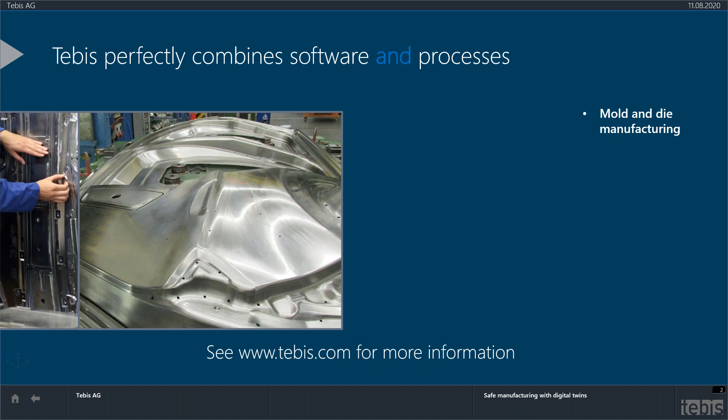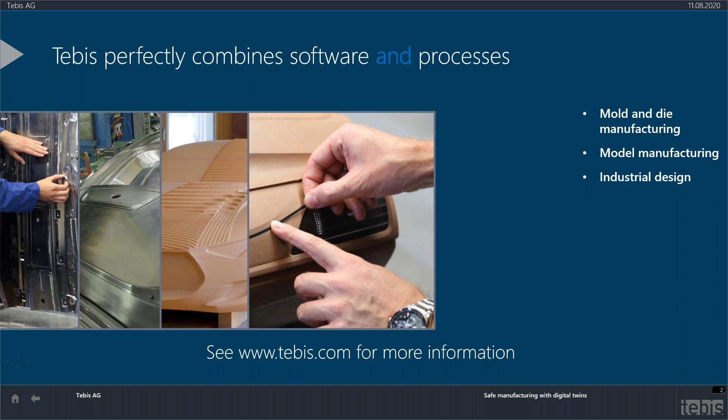That's not just in the mold and die industry, but also in the model and studio industry. These industries heavily utilize milling, machining, and manufacturing as a whole, as well as the aerospace industry and the production machining industry. We provide an essential level of know-how, knowledge, and technology that a lot of other software solutions do not provide, and we're fortunate to have many experts on hand to assist with implementation services or consulting services. We're not a small company by any means, but we have complete solutions for every single process you are looking for - processes that always make you as a customer more efficient.

We have over 2,000 customers worldwide, and over 9,000 installations of Tebis installed with happy customers. If you have not yet looked at Tebis, I urge you to go ahead and look at this. If you want more information, go to our website, where you can find a lot more information. This website has been completely redone just at the beginning of the year, and if you've not yet gone onto this particular website, I urge you to do this.

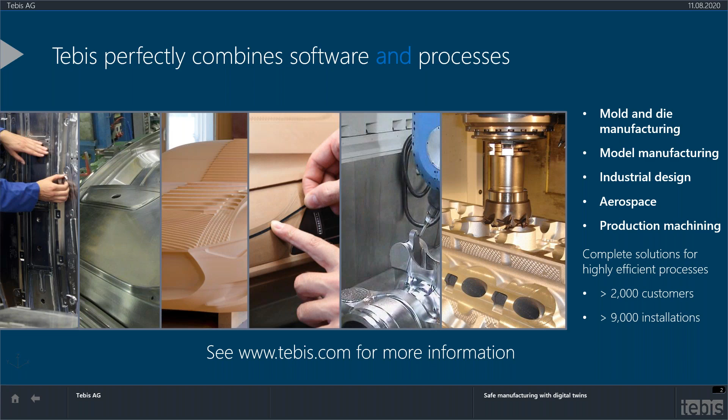I went to Wikipedia in order to get a very good understanding of what a digital twin is. It is essentially an exact digital replica of all of your physical devices that you're using for milling and manufacturing, etc. Some companies call it an avatar, which of course is very similar to it. But a digital twin represents all of your operations and all of your items that you use, from a physical product into a digital product.

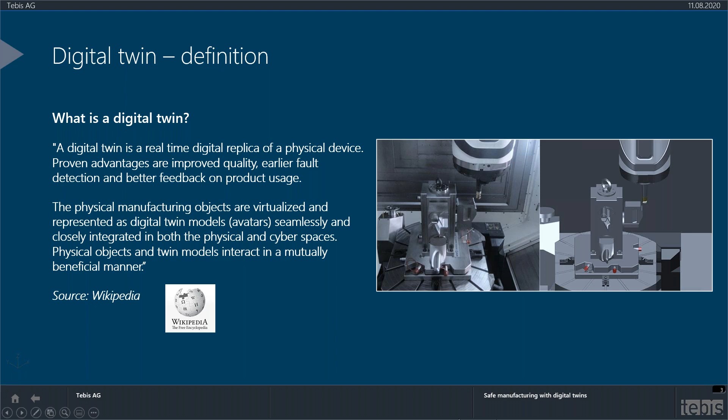So having that out of the way, knowing exactly what we're dealing with these digital twins, is this particular term a complete new term that just came out because of Internet of Things or Industry 4.0, which are all buzzwords we're hearing in the industry? I have to disappoint you, unfortunately, that this particular term, digital twins, or these avatars that are out there for you in these various systems, is not a new term.

We've had this term already for a very long time, and actually I think all of you are using a digital twin today. This has been around since the very beginning of CAD CAM, your job, the part that you are creating. This particular CAD model in a digital form is your digital twin that you're dealing with. So it's not just a picture on your CAD CAM system that gets displayed, but this particular item has a lot more technology embedded in the system.

Technology items in terms of understanding what kind of tolerances you're dealing with, technology that lets you know what is critical to your operation and what is not. That also gives additional information to the various departments that you're dealing with. So today, with today's CAD CAM systems, this particular part in your CAD CAM system has way more technology than what you've had back in the 80s.

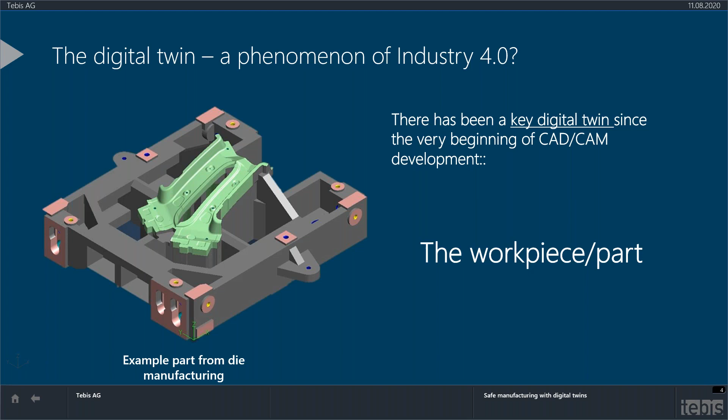Just to give you a little bit of a look back on the Tebis side, where did we utilize these digital twins and how soon did we do this? Already early on in our version 1.0, which came out in 1984 - we were one of the first CAD systems out there - you had a digital twin, which was the 3D CAD model, as we already spoke about, that represented your part, which is the real component.

Also, from the tool library, which looked very primitive probably at the time, we had a tool library that companies were able to use, as well as a post-processor that corresponded to the controller in its format that the controller can accept.

In version 2.0, we utilized 3D machine head models inside of our system in order to aid with the visualization of your machine head. In version 3.0, we came out with more enhancements to our tool library in order to create a virtual representation of your tools, to have a virtual tool crib, as we call it nowadays.

Then in 2004, with our solutions for simulation equipment and virtual machine technology, we brought to you the utilization of virtual machine models to represent exactly your machine for the purposes of somewhat lights-out machining and more realization.

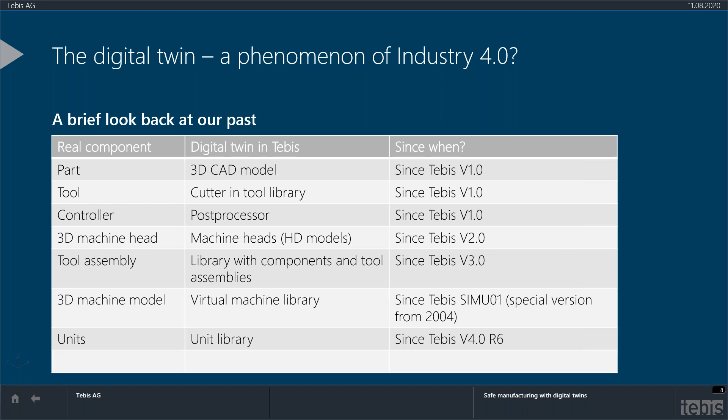Then we came up with what we call a unit library or an aggregate library in order to assist with components for mill turns and turning, such as chucks and items like that. And very soon you will be receiving a new version, coming out very, very soon, that will also entail a clamping device library to bring even more realism to your operation, more digital twin technology.

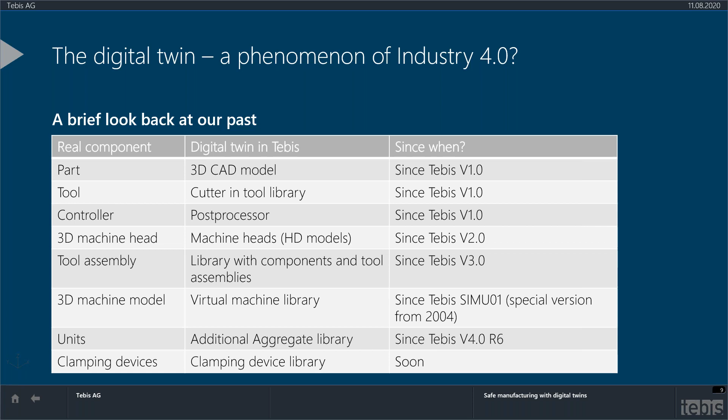We already talked about the part, or your part, not being the only important item that you have, but also your tooling equipment. Nowadays, tooling technology has really gone beyond boundaries of what you can do with them, and the capabilities are absolutely phenomenal with some of these tooling manufacturers.

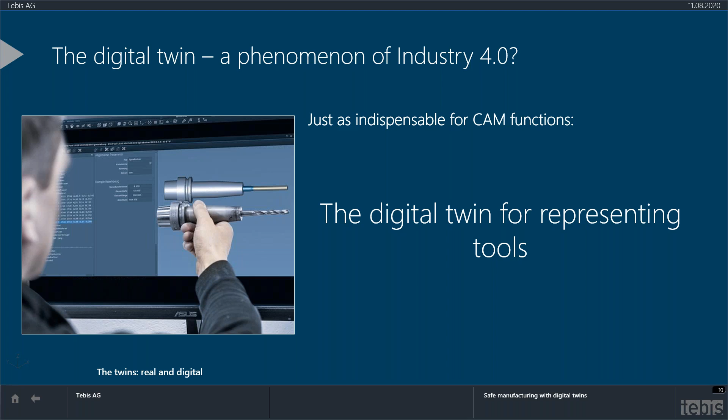We did a survey at the end of 2019 to give a little bit of context on how the industry is working with these particular digital twins. This question was asked to participants of the survey, which was done by Tebis AG in Europe: do you use virtual tool assemblies for NC programming?

The majority, 87%, said yes, they're utilizing virtual tool assemblies including holders, extensions, and cutters. The remaining 13% still use just the cutter as is. Why? Some utilize tooling in materials like foam or lesser danger areas where the full tooling assembly isn't required from their side, even though it could bring additional benefits.

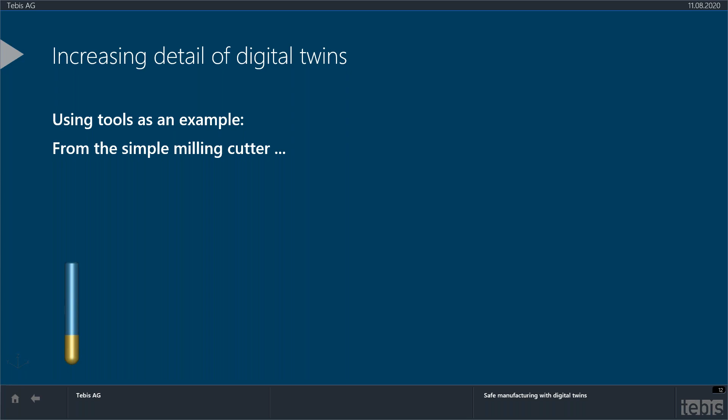Let's look back. Early on, we came out with very simplified tooling, just the cutter with a flute length or cutting length, and that was it. Very shortly after, we came out with more component-based milling and drilling tools that included additional technologies such as feeds and speeds and material parameters, so we could better control capabilities.

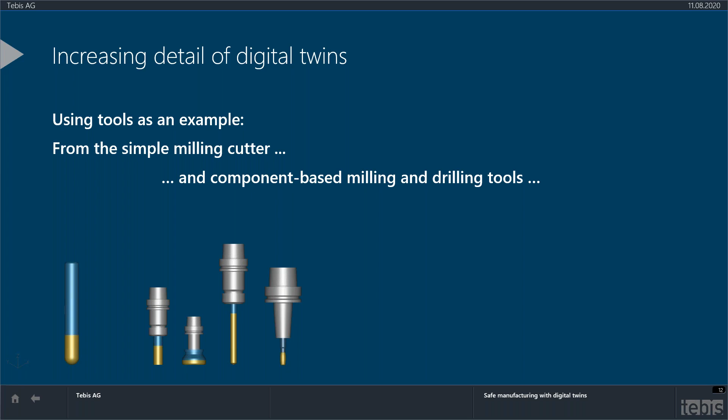This goes all the way to component-based 3D turning tools, such as hobbing equipment and live tooling in turning operations. So the virtual tool crib inside Tebis is not just a representation of the tooling itself, but also all the technology that makes this particular tool so powerful and effective.

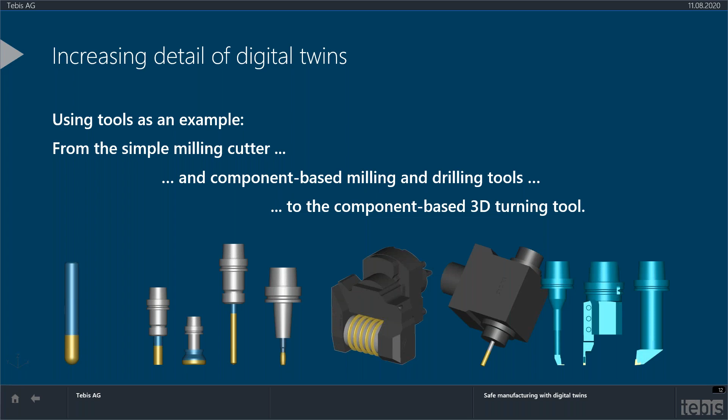Along with tooling, there needs to be a good way to import these tools inside Tebis. Thanks to tool management systems out there, Tebis integrates with various systems such as Zoller, WinTool, and TDM systems that we deal with consistently. If you haven't checked them out, I urge you to look into these tool management systems.

Our tooling manufacturers have also stepped up. Companies such as Moldino or Pokolm, as well as a German company called Ora, provide more capabilities to get all the technical parameters of these tools, not just geometry, directly into Tebis in a format Tebis accepts. This brings along recommended feeds and speeds. Check out these tooling manufacturers, it makes things a lot easier.

There are also other systems, such as tool data portals like Tools United. There's availability to get an import or export routine from Tebis directly into our system, giving you immediate information inside your virtual tool crib.

An additional item very important for increasing the reliability or realism inside these systems, besides the part and the tooling, is of course your NC machines. This changed the entire world of how we operate and program nowadays. NC machines have become more sophisticated, more powerful, and faster than any predecessor machines in the past.

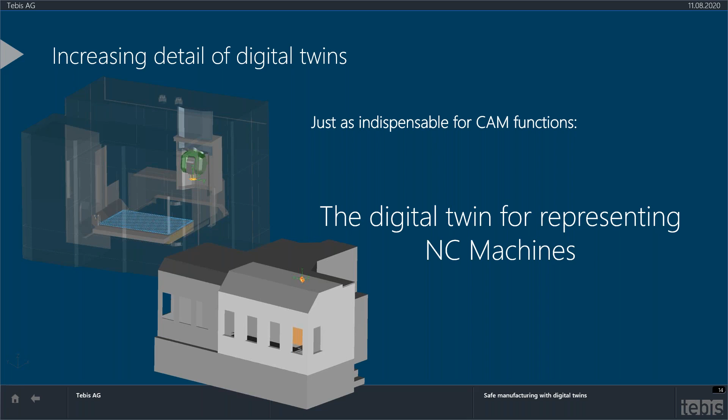So with these digital twins, before, what did we use? We used a representation of a head that gave us somewhat of an idea of how it would behave. We even had the capability inside Tebis to put a raster to it, so if your machine only operated every degree or degree and a half, this could be represented. But this was it for a very long time, until we came out with our virtual machine capabilities.

Not just for 3-axis machines, but also for full 5-axis simultaneous machines. Whether these are gantry machines, table machines, or trunnion machines, in Tebis these types of machines can be represented with the highest realism you can possibly imagine.

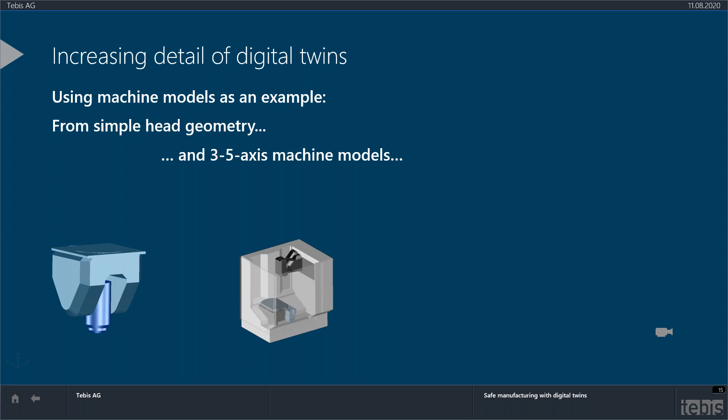But this is not where we ended up and where we stopped. We went into more complex types of machinery that go way beyond just 5-axis, with gun drills and so forth that have very complex logic for their moving capabilities with multiple heads. Just to give you an idea of some of the different capabilities of this technology, I put a small video together for you.

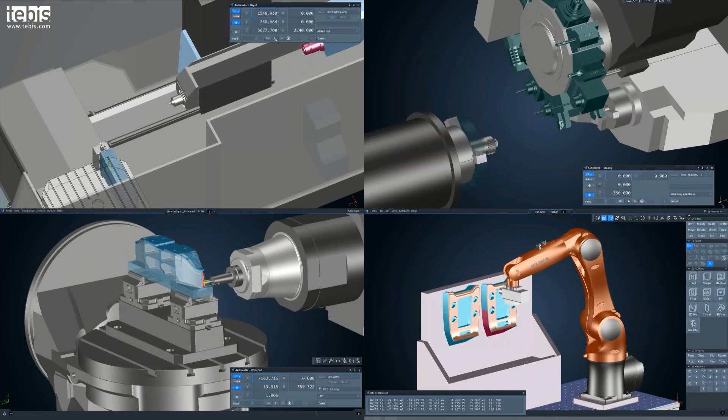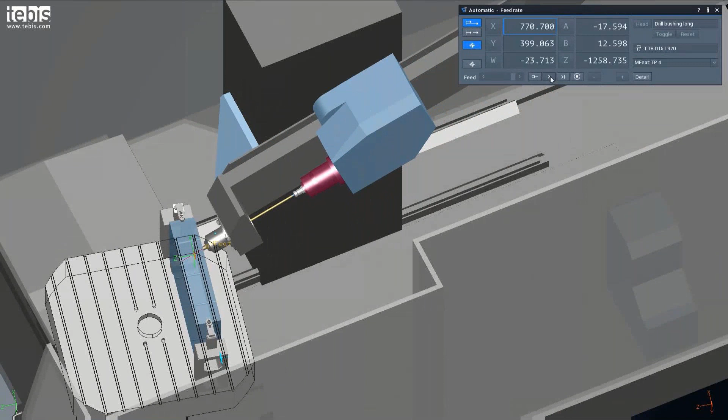Here we've got a very complex 5-axis machine, aerospace machining with a rotating table. Then we go into the capability of turning or mill-turning equipment with multiple steady rests and so forth. Going into gun drilling type capabilities with 7, 8 axes potentially, as well as the utilization of robot technology to do trimming capabilities, laser capabilities, and other operations you can operate with the robot.

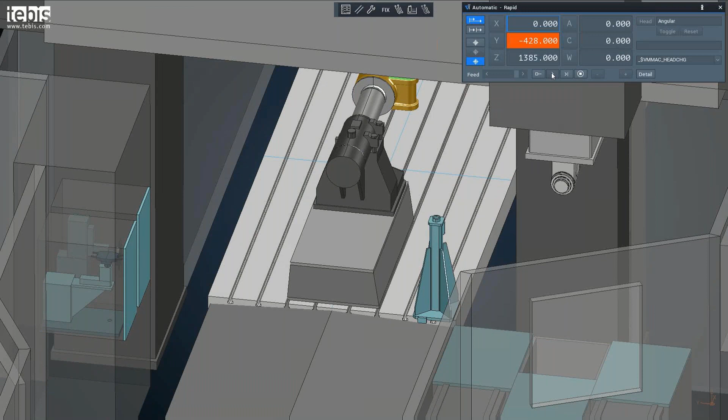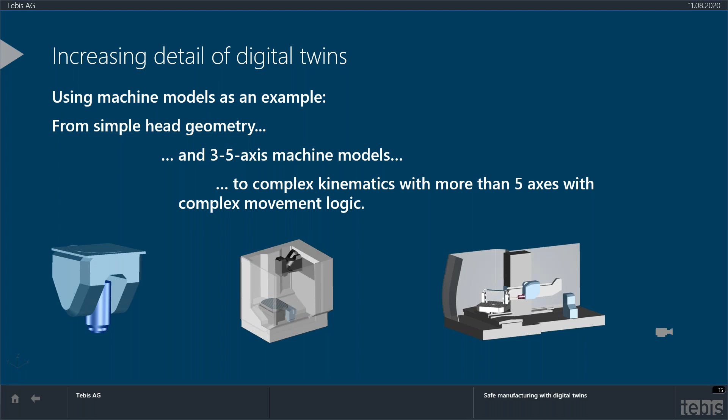But this is not the end. Any kind of complex operation - in this case we have a very large gantry machine with a rotating table doing multiple head changes in there - all of these things can be represented inside Tebis, represented to its true motion and true movement inside the machine, in order to make sure that your machines operate as safely as possible.

So since we are the manufacturer of Tebis, and we also produce for our clients post-processors and these virtual machines, it gives us the availability to look at and see from a global perspective how different countries are doing in regards to virtual machines, and who is utilizing more or less and believes in its capabilities. So what we did is we looked into our archives and looked at the areas of post-processing and post-processing with virtual machines.

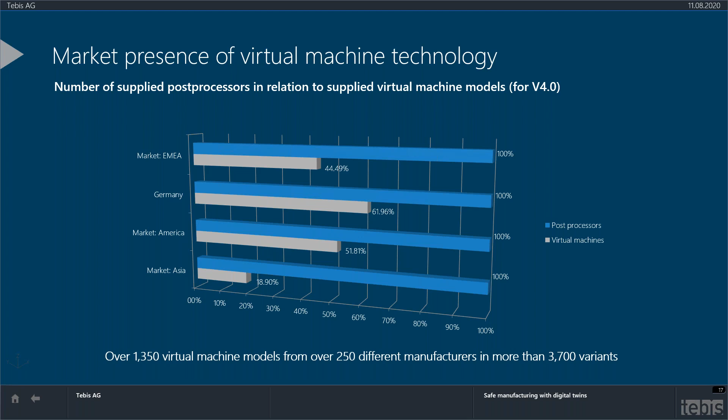Obviously, what we saw from this chart is that our German compadres over in Germany definitely are utilizing the virtual technology more than any of the other countries we're dealing with, with the US a close second.

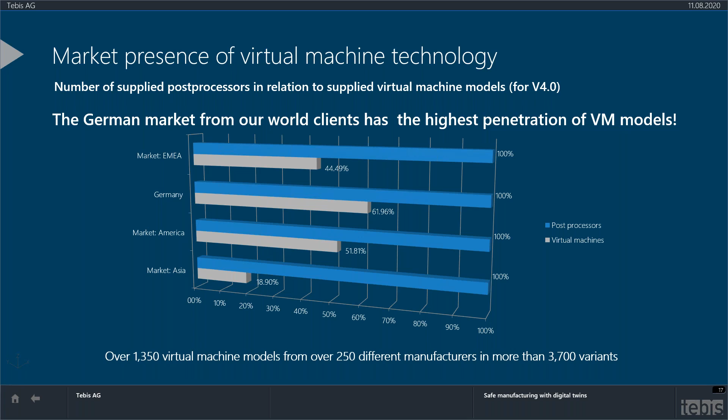So what do we learn out of this? I think virtual machines, virtual digital twins are going to be more and more prevalent going forward in the future. I think this is going to be our future in this particular manufacturing environment, that this particular technology is not going away. We also told you earlier, Tebis will be coming out very soon with an extensive library for clamping devices, as well as turning adapters. So keep a lookout for some of the next versions that are going to be released by Tebis.

Another way of increasing its capabilities in the area of digital twins, giving you more capability to predict what's going to be happening out on your shop floor, especially in your machines. We all know how this pandemic has been ravaging the manufacturing market, with some companies running with reduced staff, running with reduced operators, and so forth.

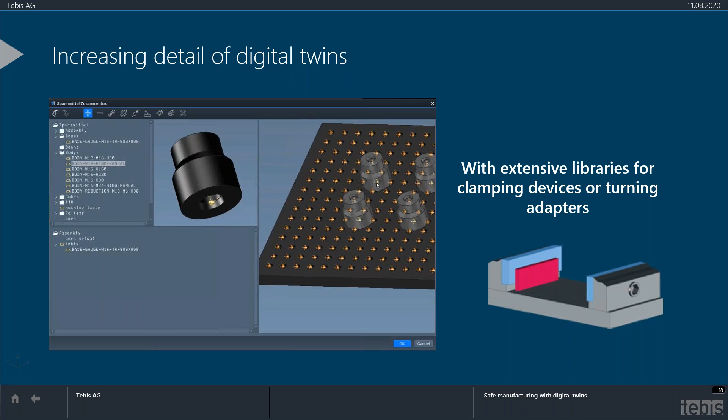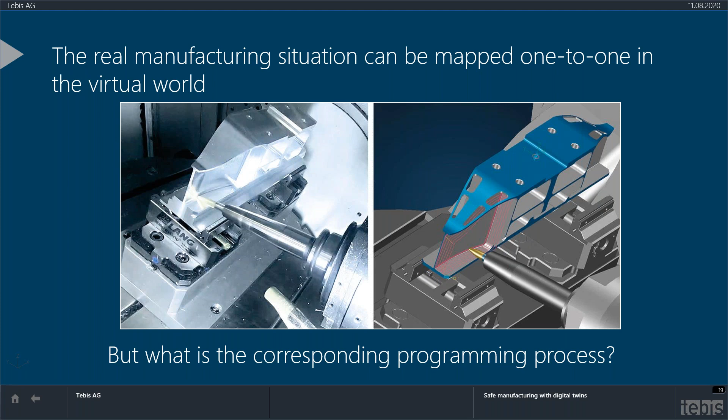So this is where we need to utilize technology that is currently available and make use of it for our operations, in order to still meet our deadlines and produce safely and efficiently. So far we've talked about digital twins with tooling, part technology, machine technology, and clamping technology. But what about your programming processes? Is that stacking up to its capabilities to be more efficient? Because if these digital twins and NC machines didn't provide an efficiency aspect, you probably wouldn't use them. So now we need to look at how companies today are processing jobs. There are three ways this is possible with this virtual machine technology.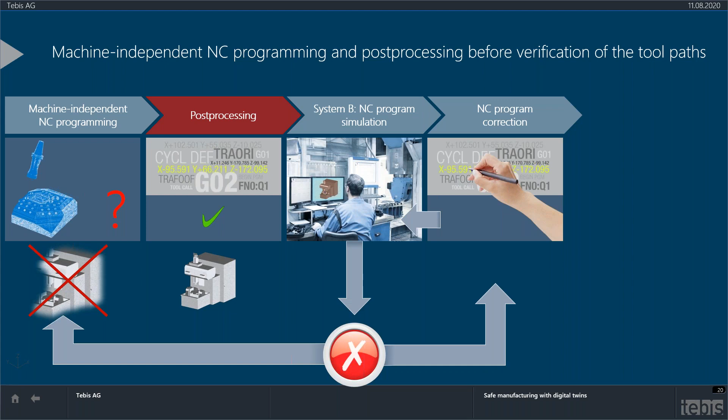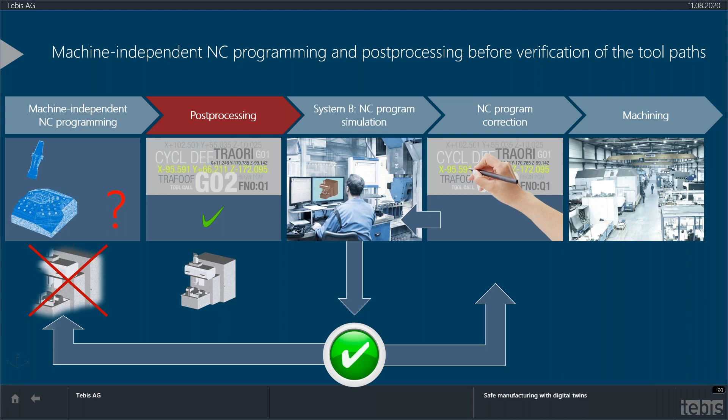So there are two ways to handle these correction solutions if there's a problem. First, it comes to a halt, and you need to determine what you can do. Most times this goes back to the CAD CAM operator, the programmer, to make changes in the toolpath so it's safe to run on that machine. Or the individual can handle it directly and make adjustments in the simulation equipment themselves. You can see there's a process loop that has to happen, and only once the person deems it adequate can it go to the machine for processing. This is one way clients and customers are utilizing this solution.

There's a second way: machine independent NC programming, then toolpath verification in the same CAM system. How does that look? Again, you have machine independent NC programming—you're not utilizing the full capability of the virtual machine, just your tooling equipment and head information, making toolpaths by maybe limiting them. You then go into a subsequent simulation system, maybe in the same CAM system, and apply these toolpaths to the particular machine, then verify if these jobs or toolpaths are okay to run.

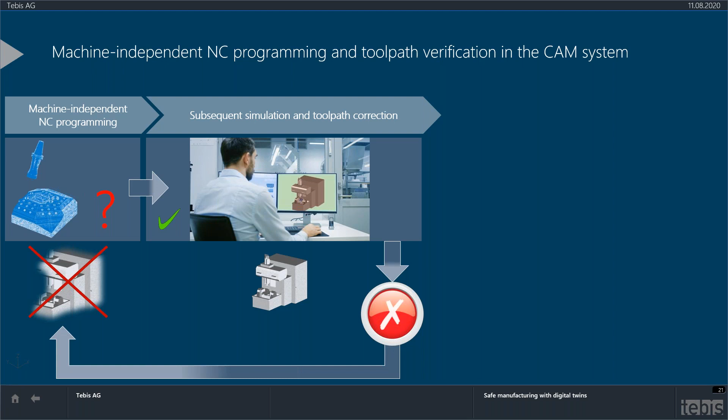Hopefully you're still following along. If I find a mistake, I need to go back to my CAD CAM system. Since I'm the same person doing it, I have to go back and make adjustments because the machine capability maybe can't handle this, or the tooling is too long, or in terms of turn mills or turning equipment, my tool suddenly crashes into the part because it has a rotary turret, and you need to adjust this. Only after this adjustment is done can you say everything is fine, and then post-process out of your system and go to your NC machines.

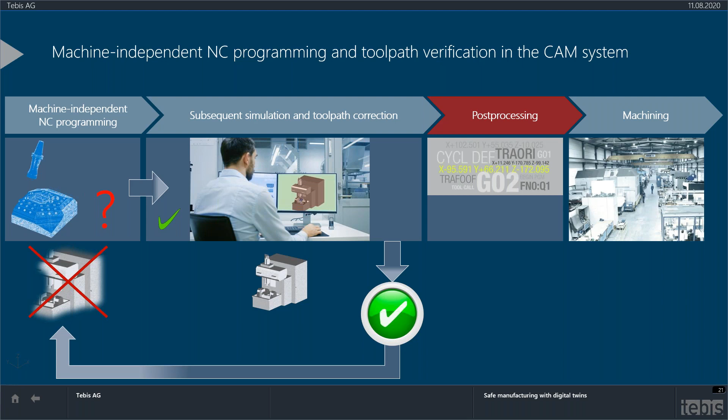The third one, since there were three, is the capability of utilizing machine-dependent capabilities right from the beginning. So right when starting, the first thought should be: what machine am I putting this on? What are its capabilities? What are all the items I'm utilizing? Then verify the NC code in the same CAM system. Of course, this is the Tebis philosophy—I'm not beating around the bush here—but this is the capability of utilizing machine-dependent NC programming solutions where I'm utilizing my machining solution right from the beginning, and I can plan inside the Tebis simulator.

Will it fit on the job? How many setups do I need to make? What kind of clamping tools do I need to have? I can utilize my digital twins for my tooling equipment and clamping equipment. I can determine which machine it should go on, and whether I need a riser on this particular machine or not.

And then select my digital twins for the NC machine in order to set this up and determine where my clamps need to go to process this job as efficiently as possible. Right from the get-go, Tebis programmers immediately select their jobs, their setup routines, and their machine. So you're programming with the machine at hand, as if teleported into your machine, determining its capabilities before anything happens while making your toolpath.

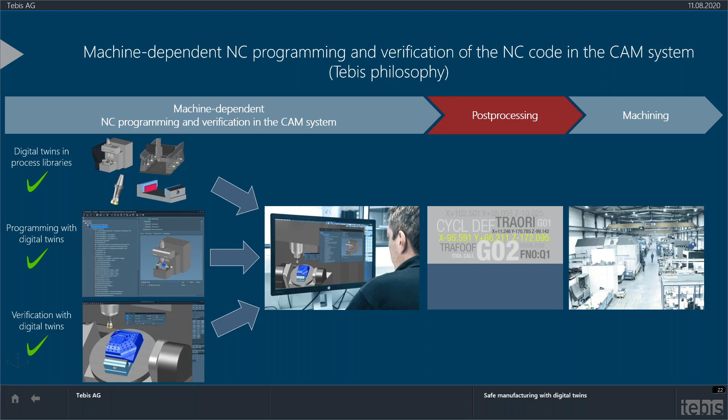From there, I'm feeding this directly into my process and can post-process out to my machines. You can already see that this is a very smooth, direct, forward-looking process that a lot of the other systems out there are not fully utilizing, and not making as efficient as they can be.

Again, a survey was asked to these attendees: how do you check your NC programs? You immediately see why aren't there only three items, as I said? Why is there a fourth item? The fourth item is very specific to the aerospace industry.

There's a mandate that not only an internal verification system is necessary, but also a secondary virtual simulation system needs to be there, whether that's on the controller of the machine, or a secondary simulation system that also comes into place.

Let's look at the percentages. 9% use machine-independent programming, so I'm happy to see they're already looking at this. Mind you, a lot of them were probably Tebis utilization already. But 69%, the majority of these attendees, utilize virtual machine models right from the get-go, right from the beginning, in order to make a very positive impact on efficiency.

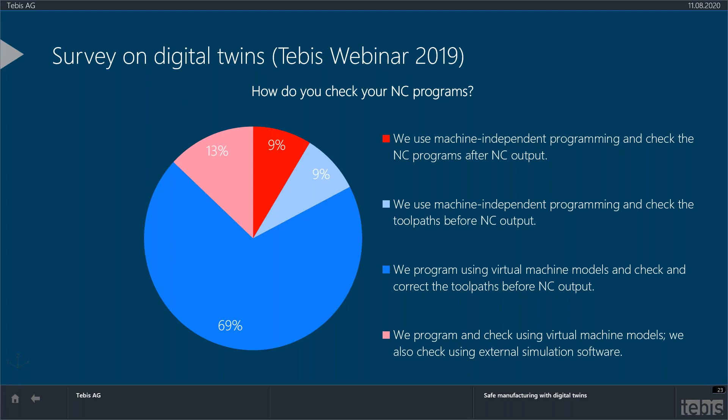13% of them, however, utilize secondary simulation software afterwards. Like I said, a lot of the aerospace industry demands this, and we have several customers doing this today in order to get these delicate and very expensive models machined with Tebis.

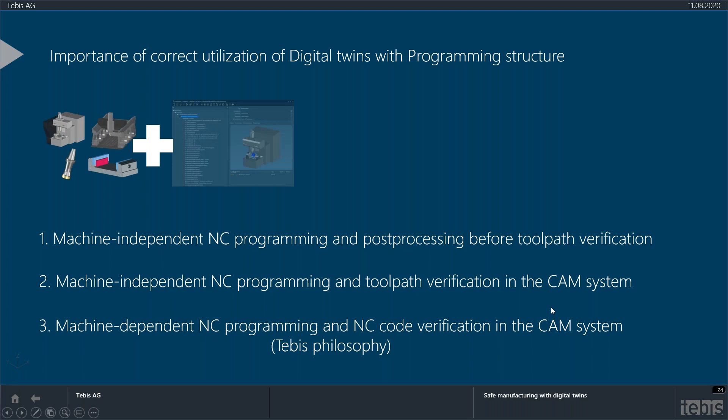Again, these three items are the way we program today. Is one better than the other? Depending on how you're operating, that's key. However, we all try to be more efficient, more forward-looking, making sure our machines are safer with their processes and jobs at hand. The Tebis philosophy really pushes this to its limit, and there's a lot more in the pipeline from development to give customers even higher realism and higher capabilities with these digital twins.

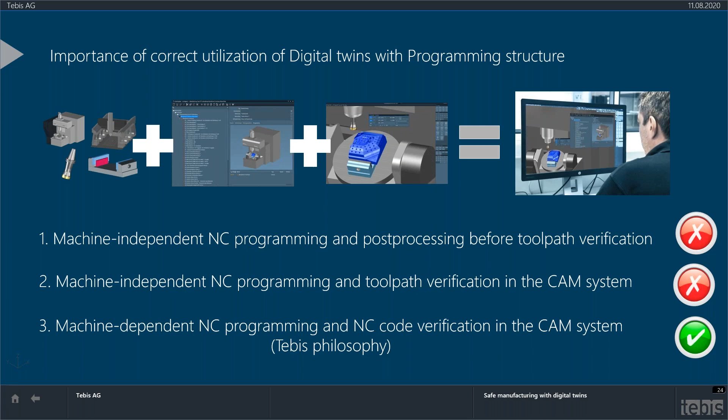So again, another question was asked, and I wanted to give you that information as well. What do you think is the most reliable, or safest, procedure out of these items we've already brought to you? Again, these are the same four topics.

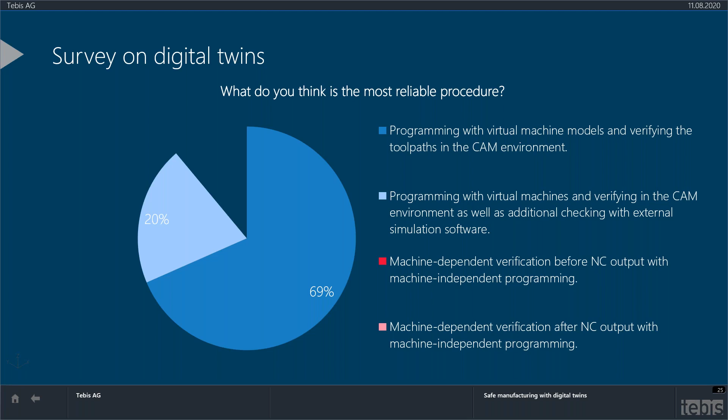69% of those surveyed think that programming with virtual machine models is the safest process, because you have all the entities at hand: your clamping devices, your tooling equipment, with proper safeties, step-overs, feeds and speeds. 20% believe that programming with virtual machines and then verifying in the same CAM system is a safe process. You can see the other two items for yourself.

One more question: what do you think is the most efficient procedure? I think this is more of a loaded question. You can imagine what these individuals would vote for as the most efficient procedure. Of course, the Tebis process, or the Tebis philosophy, is definitely without a doubt the most efficient programming process in reliability, safety, and capabilities outside on the NC machine, that goes way above anybody else's capabilities. 10% believe machine-dependent verification before NC output is an efficient process, and 12% utilize the latter.

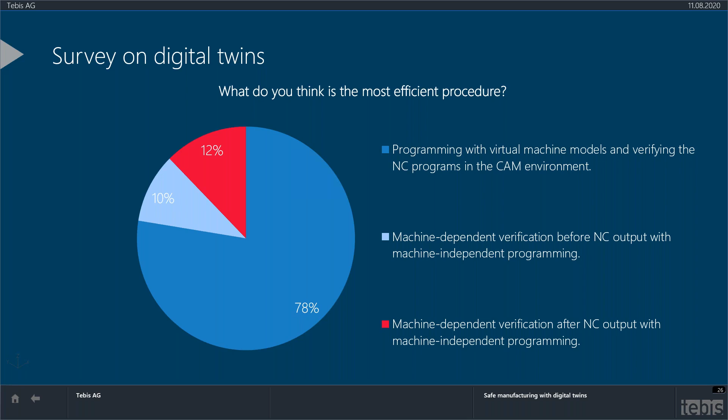So you can kind of get the idea. We always need to look at capabilities of technology, especially during this pandemic we're finding ourselves in, trying to utilize technology to its biggest impact. And the biggest impact is always the saving of dollars. So obviously there are some weaknesses.

What are some of the problems that we're running into? In all 3 or even 4 of these items, the post-processor is your limiting factor. I'm not lying to you here, but the post-processor is probably your most limiting factor. Having a reliable and safe process with your post-processor is key.

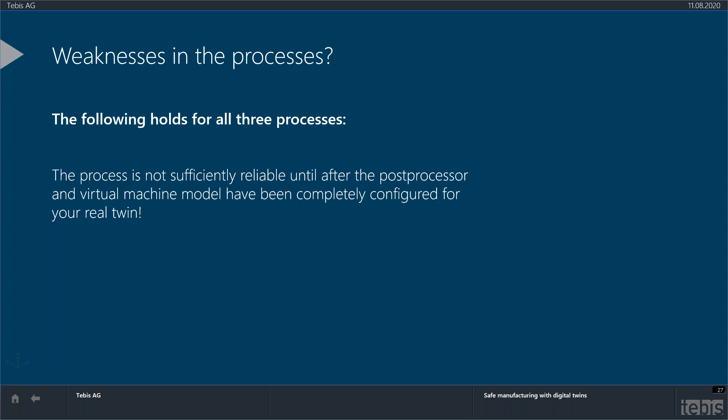There's so many companies that have said, well, if you are post-processing before you're simulating, who guarantees that this post-processor is good? The answer is always Tebis has a process, a verification process, where we do acceptance testing on the virtual machine process as well as on the post-processor. We make sure we go through our checklist of all potential capability flaws and catch them in our test acceptance. So we are actually on site verifying that the machine is accurate, and then verifying its post capabilities depending on your needs.

I'm happy to say that our post writers are probably one of the most expert post writers that are out there, and we can put stuff into our posts that other systems simply cannot. That's just the simple fact. So having these acceptance test parts employed to all NC programs and all of its variants is key.

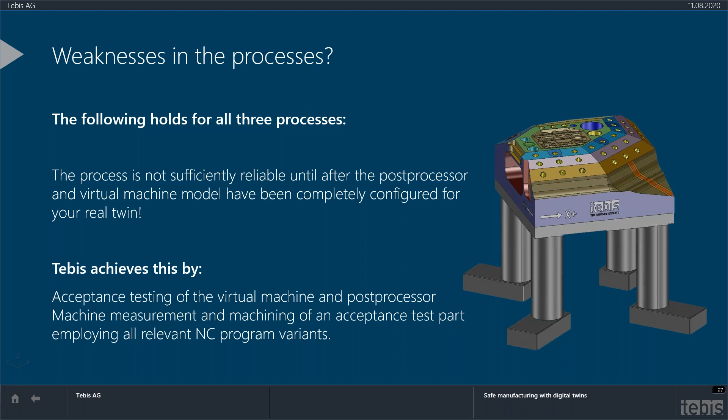Only then, if you verify the machines - and we're not like other systems out there that just accept the manufacturer's model for your machine - because we've already proven numerous times to clients that some of the models are not accurate from the manufacturer. We only find that out when we measure these machines through our ways of determining and measuring them.

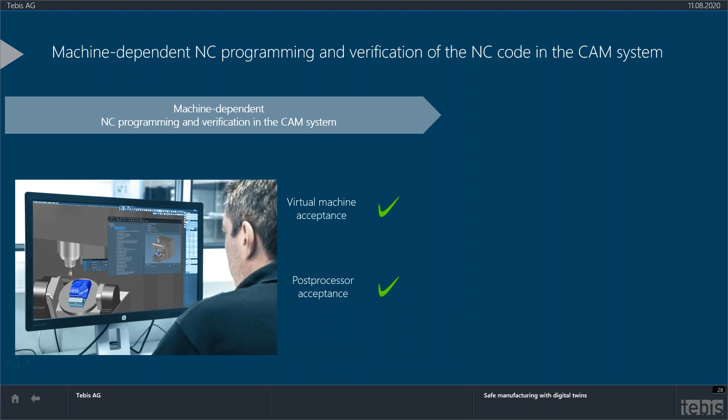But only when we go through and accept the virtual machine and accept the post processor, and a document is then provided, you then output via our tested and verified post processors, and you provide these particular items to the machine. So these are very key aspects, and only from what I know of, Tebis is providing this particular service to our clients, that we take our virtual machines and get them tested by our team.

Our team comes in with our machinery in order to test these machines, and we have a checklist that you can also see and verify, and you are an integral part in this particular process. Obviously every single capability that your machine has, we want to implement in our post processors and implement into our virtual machines.

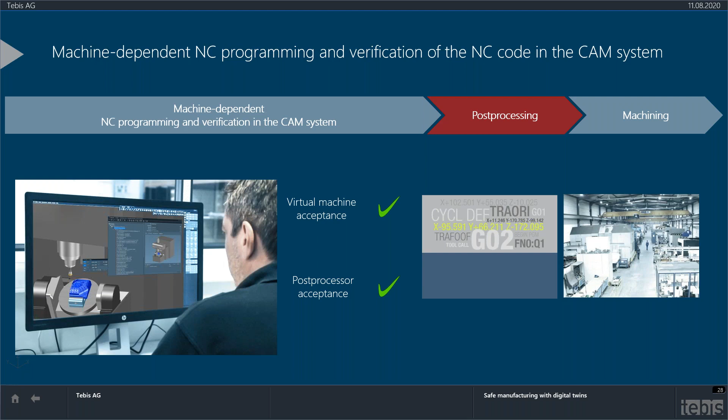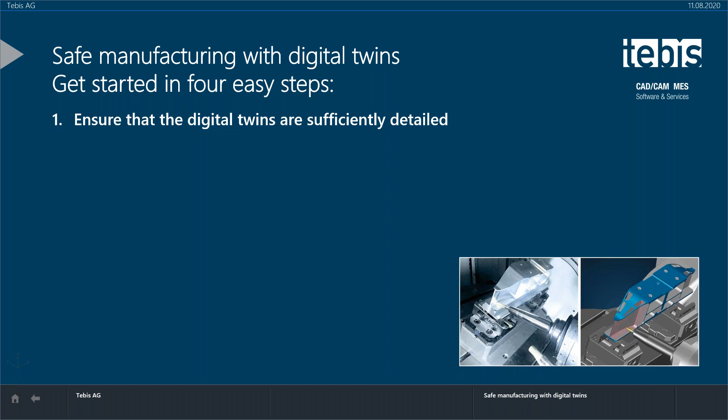Second item that you need to make sure of is clarify that the data that comes in from your manufacturer is true, that you get all this information in, and also which interfaces are needed. Also on your digital parts that you bring in, make sure that the interfaces you're using are state of the art, that bring in all of the geometry models. With Tebis, we have direct interfaces to a lot of the design systems out there that can ensure this.

Make sure that you avoid these iteration loops we talked about earlier, where you constantly have to post out, verify, and then go back again. These iteration loops cost you a ton of time. Do it inside the same system you're programming with, using machine-dependent realization, so you can catch these things beforehand.

Also make sure the support group you're utilizing for these digital twins has a way to implement these processes, that they can come out and do the verification on the machine, verify the post processors, but also give you advice on automation procedures. Because automation hand in hand with digital twins really propels you to the front line.

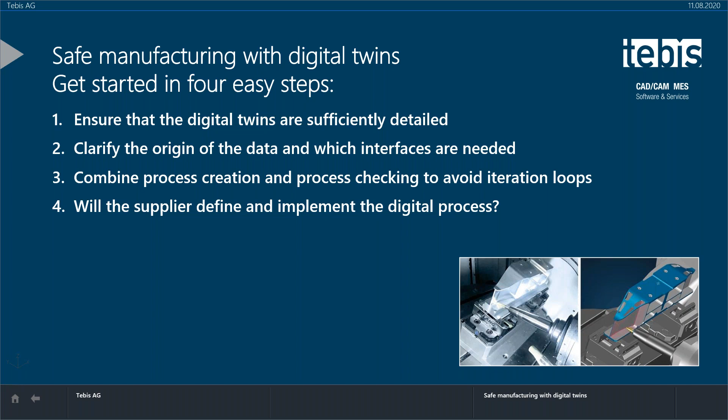So I thank you for joining this webinar to get more educated on its capabilities, what is out there with these digital twins, what you can do with this, and how you can make your process much faster. This brings me to the end of this webinar about digital twins.